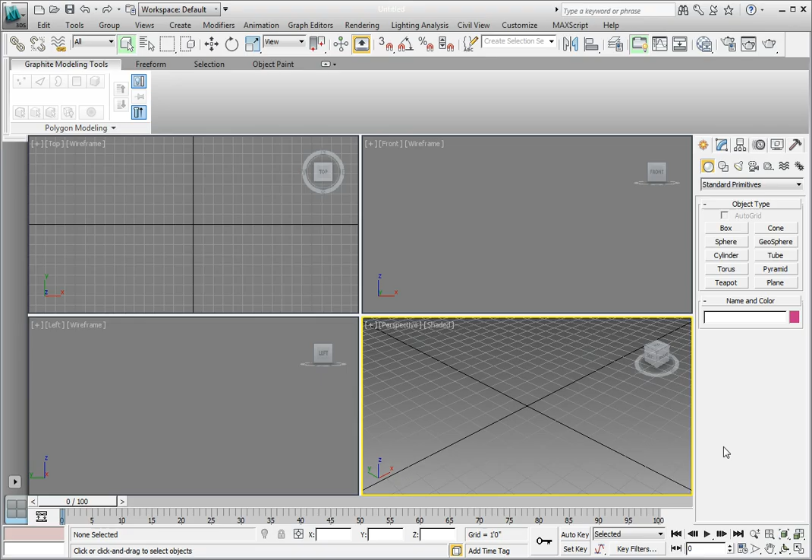Let's begin learning about object space modifiers by opening a new scene, one we haven't used yet. Click on the Application button, and in the drop-down menu select Open. Navigate to the Chapter 3 Datasets directory and open the file Chapter 3 Facade Bevel Profile 01.max. You can double-click on it to open it, or select it and click the Open button.

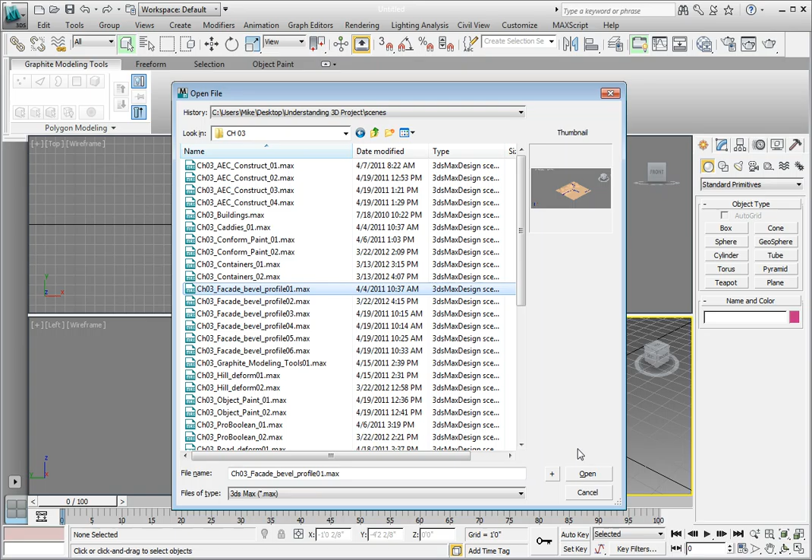The file that opens is our hilly scene with a landscape and our street. We have two additional pieces of 2D geometry in this scene that we'll be using for the exercise in this lesson. The first thing we want to do is save with an incremental file name.

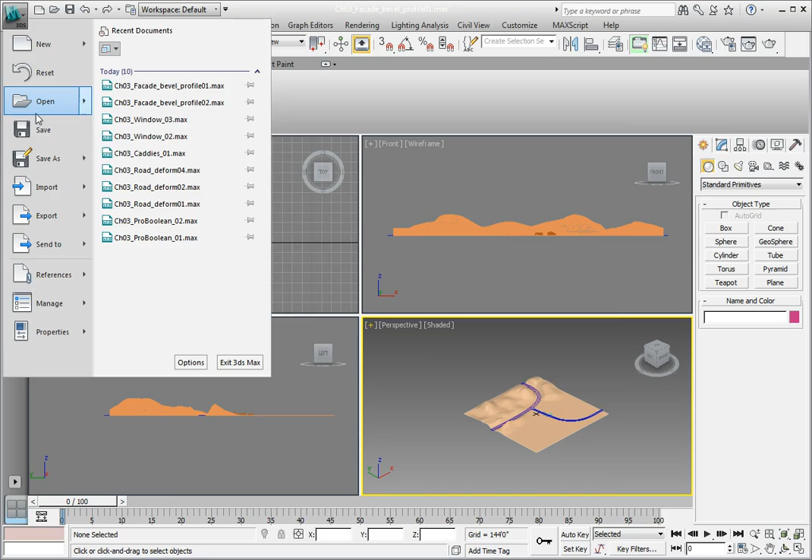Go to the Application button, and in the drop-down menu select Save As, then click the Increment button. This will save the file with a new file name, Chapter 3 Facade Bevel Profile 02. If it asks you to overwrite a file, click Yes. Now we are working with a new file, just in case we mess something up and need to load this file again. What we're going to do in this scene is put a roof on a building called Building 5.

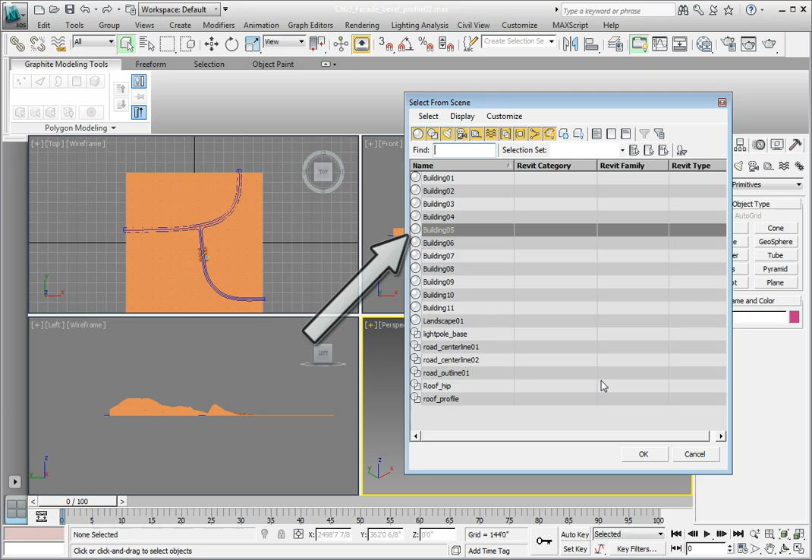Let's get Building 5 selected. We need to select the object, and the easiest way to do that is to click the Select by Name option from the main toolbar, or press the H key on the keyboard. This opens the Select from Scene dialog, giving us a list of all the objects in our scene. Double-click on Building 5 to select it, or click once on it and then click OK in the bottom right of the dialog. That selects Building 5 in our scene.

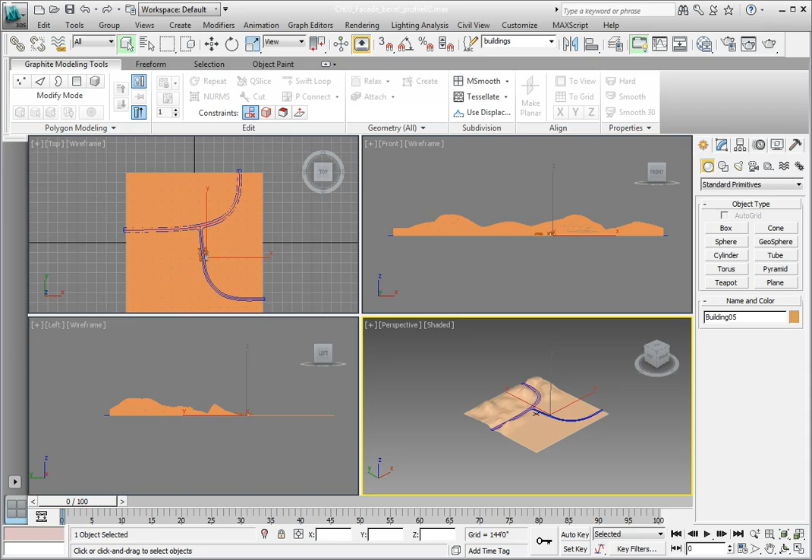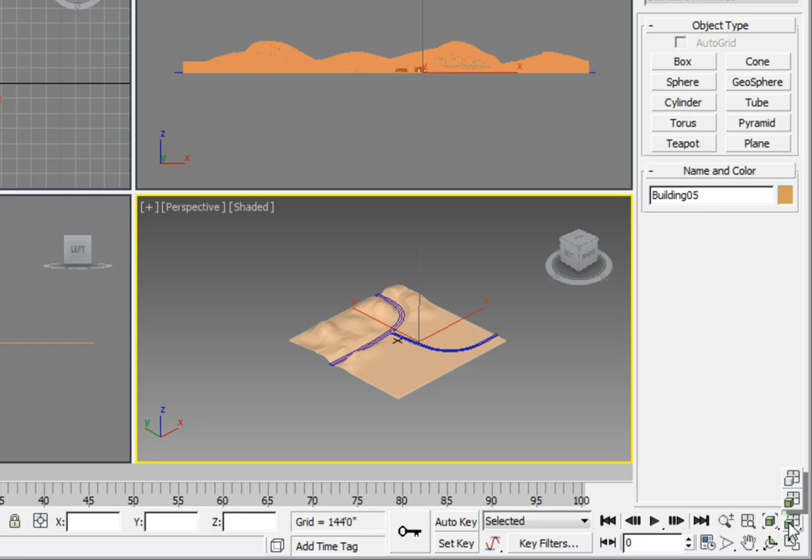Now we're going to zoom in on just that building in all the viewports. We used Isolate Selection before, which hid everything except the object we were working on and zoomed in on it. Here, we just want to zoom in without hiding the other objects. In the lower right corner of the display you'll see the Navigate buttons. We want the Zoom Extents All button, but the default option zooms to the extents of all objects in the scene, which isn't what we want. We want to zoom to the extents of just the selected object. Click and hold the Zoom Extents All button, and a flyout will appear. Select the Zoom Extents All Selected option. This fills all the viewports with only the selected object, without hiding anything or entering isolation mode—it just zooms to the selected object.

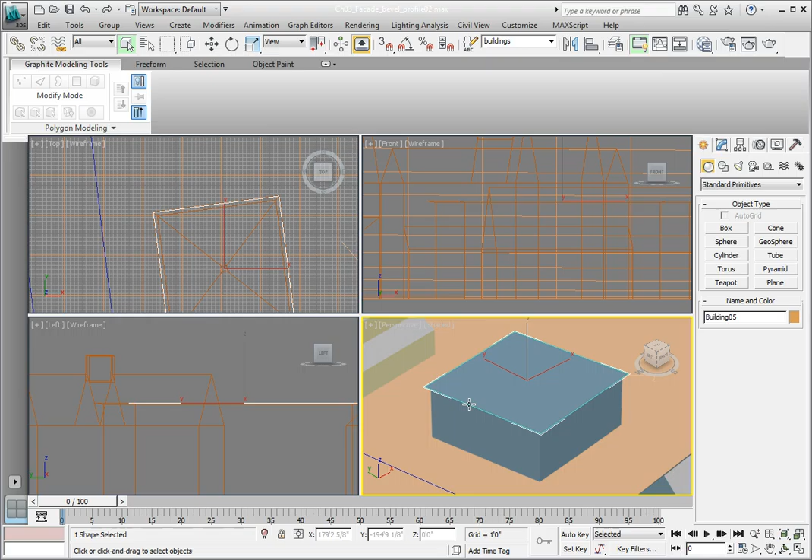You'll notice a new rectangle surrounding the roof of Building 5. Select the 2D shape by clicking on it, then switch to the Modify panel in the Command panel. Make sure you have the object called Roof_Hip selected. If not, click again, or select it from the Select by Name option in the main toolbar—it should be fairly easy to select in the viewport. This is a 2D primitive rectangle, a parametric object with parameters for length, width, and corner radius.

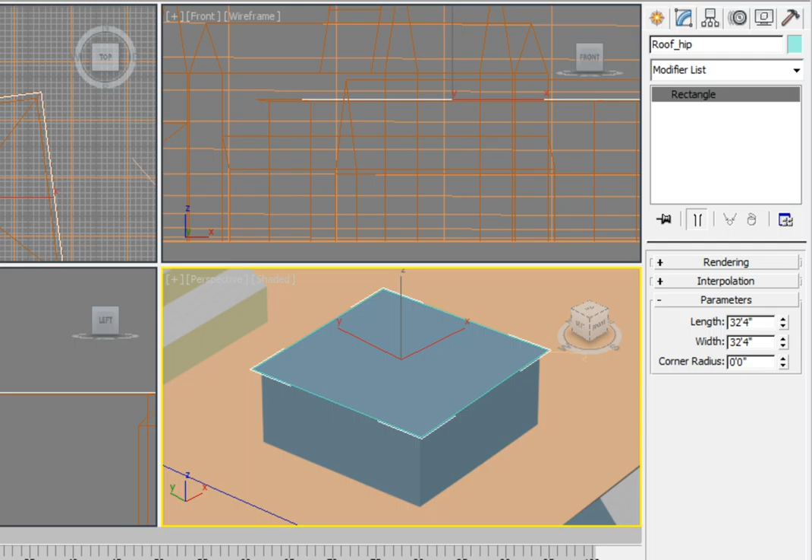We want to apply an object space modifier to this called Bevel Profile. To apply it, click the down arrow to the right of the modifier list. In the Object Space Modifier area of the modifiers list, look for the Bevel Profile modifier and click it. This applies the modifier above the rectangle in the modifier stack. It's no longer a 2D rectangle now—it's a 3D object, though in this case it just looks like a flat plane.

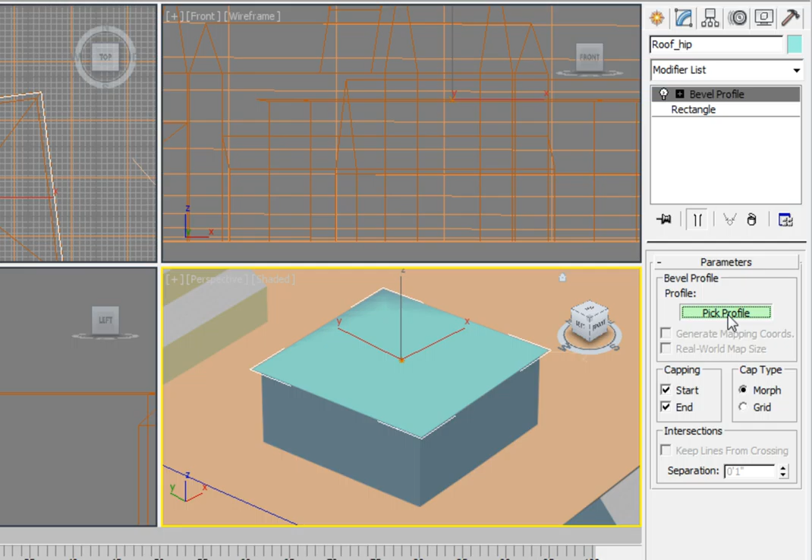This modifier has its own parameters, one of them being the Bevel Profile. Click the Pick Profile button. Now we need to select another 2D shape—in this scene it's called Roof Profile. If you're not sure where it is, press H on the keyboard to bring up the Pick Object dialog, which only shows valid 2D shapes. You'll see one called Roof Profile—click to select it, then click the Pick button in the lower right-hand side.

We now have something that looks sort of like a mansard roof—not exactly a hip roof. You'll notice it has fascia, soffit, trim, and roof surfaces. So one modifier is acting on the rectangle and uses a profile shape. We can zoom in on it in the top viewport and see it's just a simple 2D shape. The modifier has used this shape, applied it to the rectangle, and created 3D geometry. This is an object space modifier for working on two pieces of two-dimensional geometry to create a new 3D object.

Press Ctrl S to save the file.